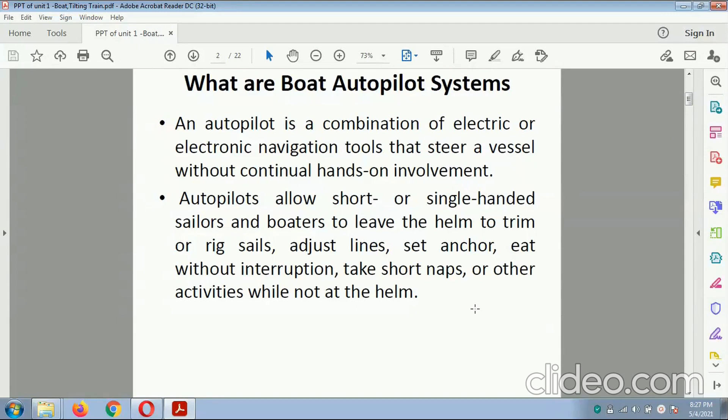So autopilots have been used on commercial sail and power vessels for over a century in various forms, making navigation safer and more convenient. Mariners have called the autopilot by nicknames like Iron Mike or Otto, that is a silent crew. Autopilots for smaller vessels are generally priced below 1 lakh with limited features. The below deck ones are higher performing and complex, and cost is upward.

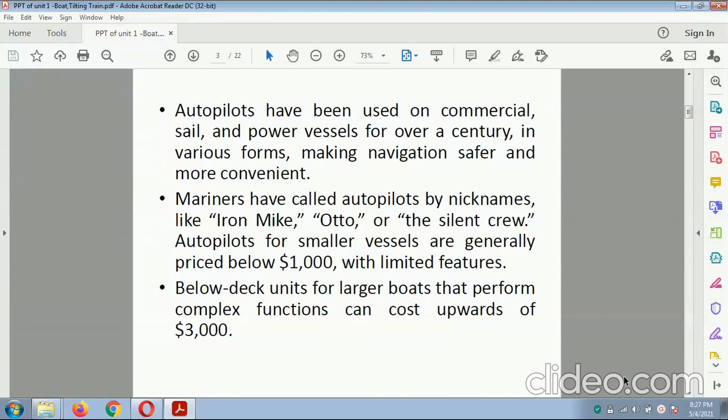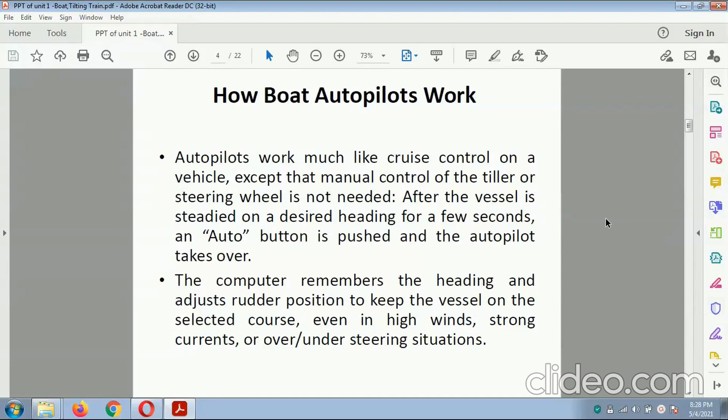How does the autopilot work? The autopilot works much like cruise control on a vehicle, except that manual control of the tiller or steering wheel is not needed. After the vessel is steadied on the desired heading for a few seconds, an auto button is pushed and the autopilot takes over. The computer remembers the heading and adjusts the rudder position to keep the vessel on the selected course, even in high winds, strong current or under steering situations.

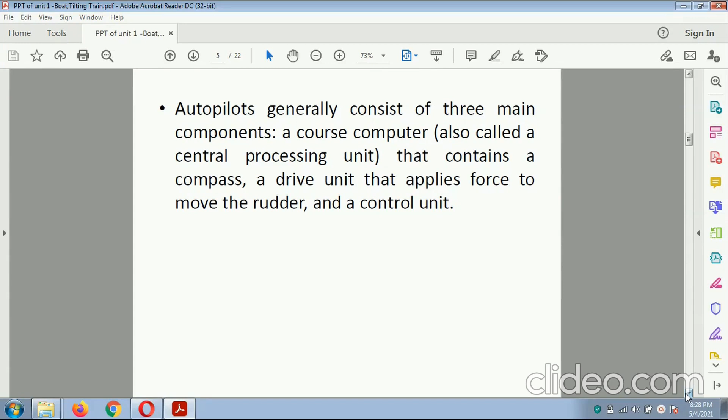An autopilot generally consists of 3 main components: a course computer, called the central processing unit, that contains the compass, a drive unit that applies the force to move the rudder, and a control unit. The different types of autopilot system: autopilots come in a variety of arrangements, dictated by the vessel length, displacement and steering type, including above deck units and below deck units described below.

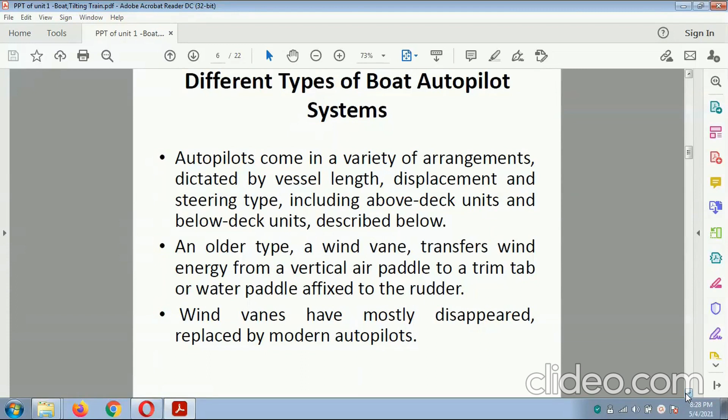An older type, the wind vane, transfers wind energy from a vertical air paddle to a trim tab or water paddle affixed to the rudder. Wind vanes have mostly disappeared, replaced by modern autopilots.

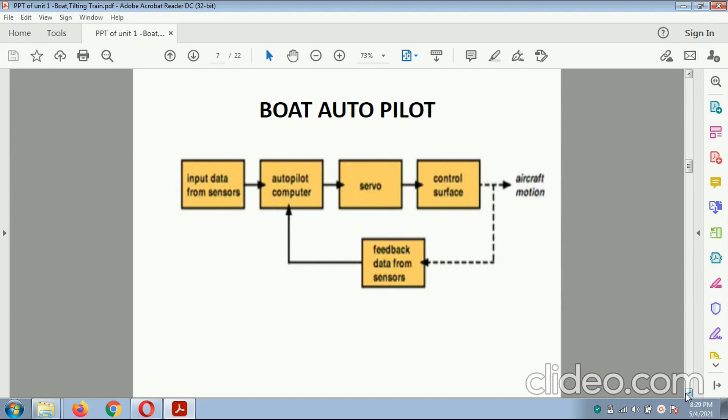This is a diagram related to the autopilot system. The input data from the sensor is sensed. The autopilot is controlled with the computer. Then this data is transferred to the servo motor. This data is transferred to the control surfaces, and with respect to that the aircraft motion is carried out and the feedback goes to the autopilot control computer. So this is the traditional diagram which explains the autopilot system.

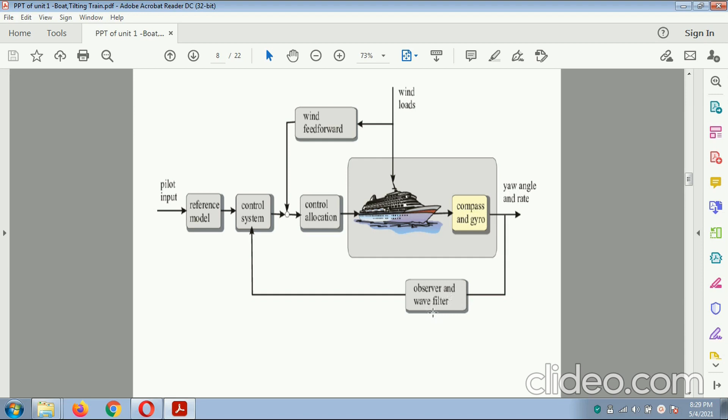From the start, see my cursor, the wind load is applied on the boat, the wind feedforward goes to the control allocation, the pilot input, reference model and control systems are attached, and this wind feedforward again goes to control allocation. With respect to the compass and gyro, the yaw angle and rate can be calculated, the water waves are observed, and feedback goes to the control system. So in this way the autopilot works.

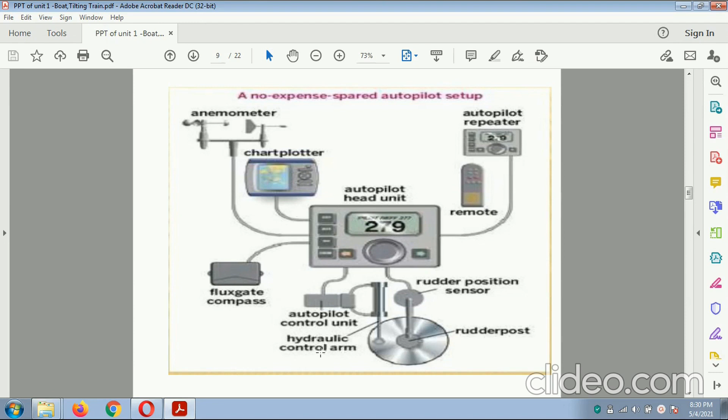The anemometer is attached, the chart plotter is attached, fluxgate compass is attached, autopilot repeater is attached with remote, and these are controlled with respect to the rudder post, and the rudder post works with respect to the hydraulic arm. Autopilots are self-steering devices for power or sailboats. They can hold the vessel on a preset compass course, and sophisticated pilots can be connected to a GPS receiver or gather data from boat instruments, and can handle a lot more advanced tasks.

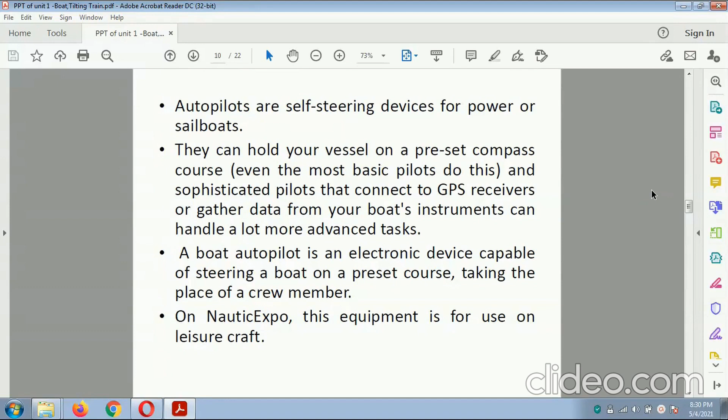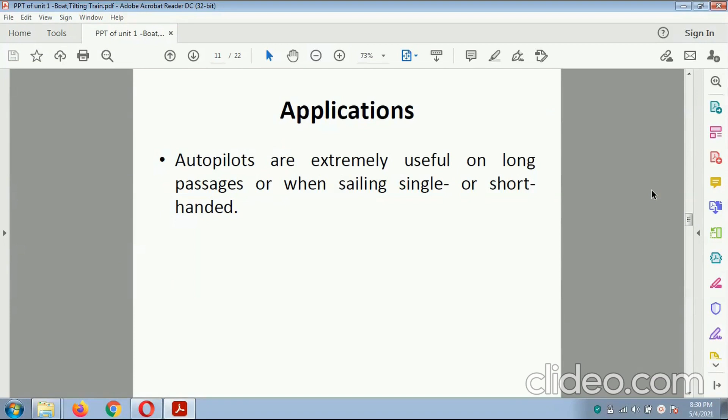A boat autopilot is an electronic device capable of steering a boat on a preset course, taking the place of crew members. Application: autopilots are extremely useful on long passages or when sailing single or short-handed. The technology: most autopilots include an electro-hydraulic pump and cylinder constituting the system's mechanical arm. The cylinder actuates the helm according to instructions from the electronic control unit. The control unit analyzes the input data and sends instructions to the pump cylinder.

The sensor reads the current course from the gyro compass as well as the helm position. The control screen is used to configure the autopilot and indicate the course to be followed. Some autopilots are better suited to motor vessels and others to sailboats. They also vary by steering system: tiller, wheel, quadrant.

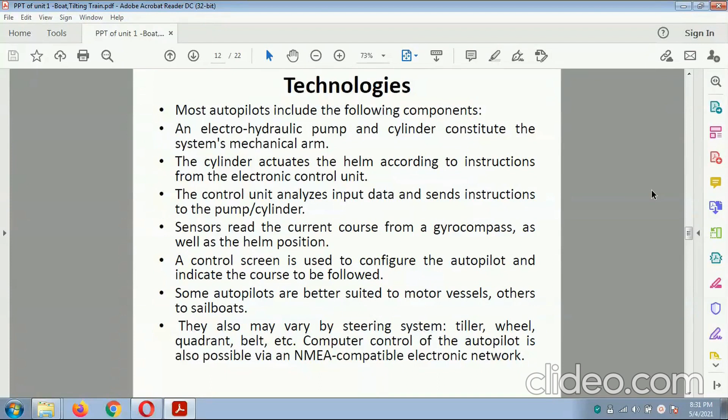The computer control of the autopilot is also possible via an NMEA-compatible electronic network. The autopilot is a combination of electric or electronic navigation tools that steer a vessel without continuous hands-on involvement.

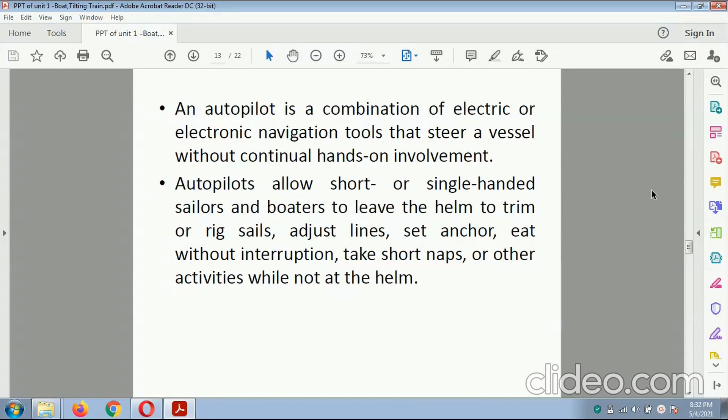The autopilot allows the short-handed or single-handed sailor or boater to leave the helm, to trim the sail, adjust lines, set anchor, eat without interruption, take short naps and other activities while not at the helm.

The high-speed tilting train. The second point is the high-speed tilting train. All students know what the tilting train is. When the speed is increased and there is a turn, the train appears to tilt. The train does not tilt, but it gives the position like tilting. So, the high-speed tilting train.

The tilting train consists of a tilting mechanism that enables it to increase the speed on regular track. In the upper part of the tilting train, the passengers are seated, tilted sideways. During the motion of the train, if the train has to steer left in a left turn, the coach of the train will be tilted to the left in order to compensate the centrifugal push to the right, and conversely during the right turn.

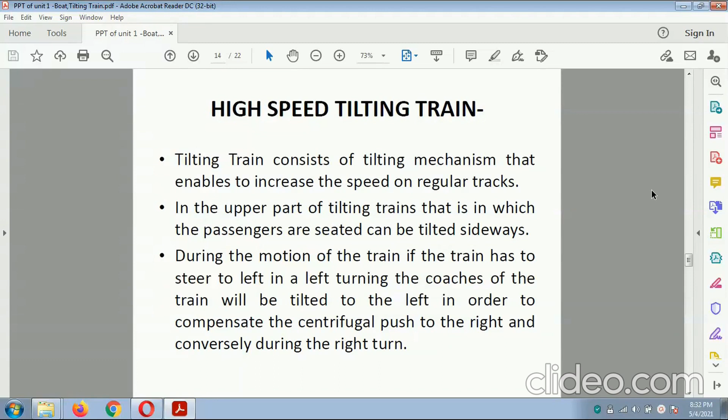The tilting train can be classified into different categories according to the features of their tilting system. On every type of tilting train, the tilting system shall perform three main functions. First, they have to identify accurately and without delay the initial position of the curve transition. Second, they have to tilt the car body according to the tilting algorithm provided by the system. And finally, they have to verify that the provided amount of tilt corresponds to the tilt demand.

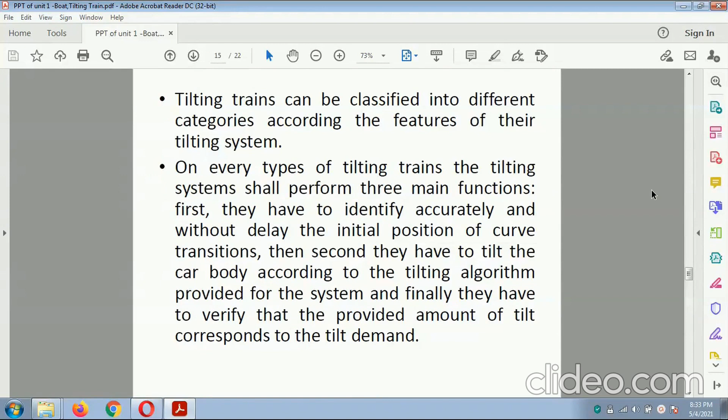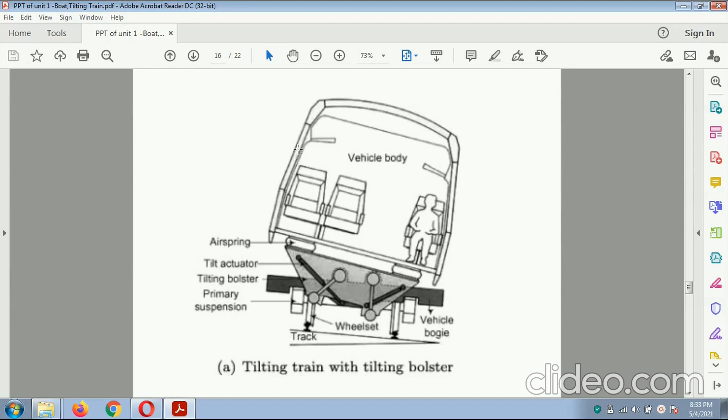So this is a diagram related to the tilting system. This is the track, and this is the position of the track. In that position, the wheel is set, and with respect to the force acting on the train, it can be tilted, and the train does not drop down because the centrifugal force is generated at this side. With respect to that side the train can only tilt, it cannot drop down, and in this way the track angle can change while increasing the speed of the train.

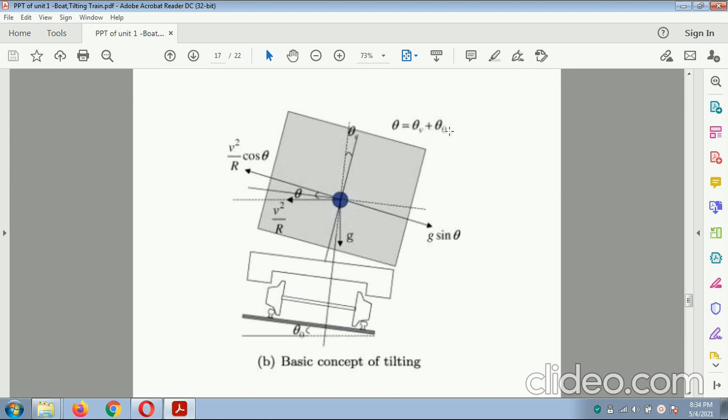The principal concept of the car body of a tilting train. Active tilt is actively controlled by sensors and electronics and executed by an actuator, usually hydraulic or electric. This normally has no impact on the safety of an actively tilted train. The center of gravity does not essentially change in the lateral position.

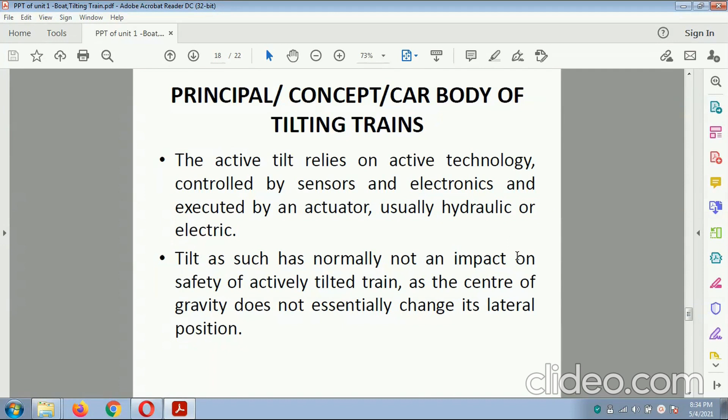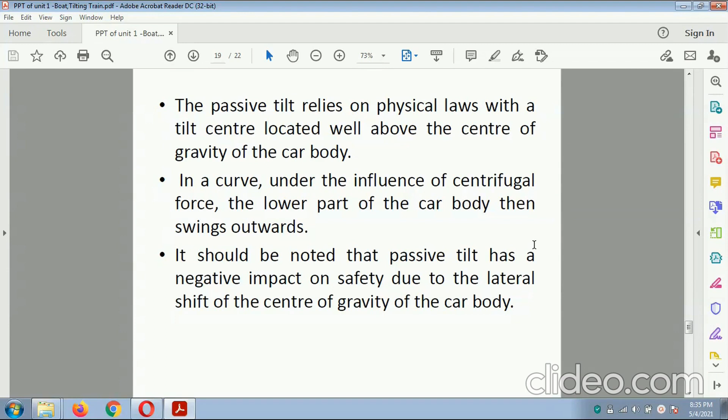So the train and the train passengers are subjected to the lateral force when the train passes through a horizontal curve. The car body rolls inwards and reduces the lateral acceleration felt by the passengers, allowing the train to navigate curves at higher speed. Trains tilting the car bodies inwards in curves are called tilting trains.

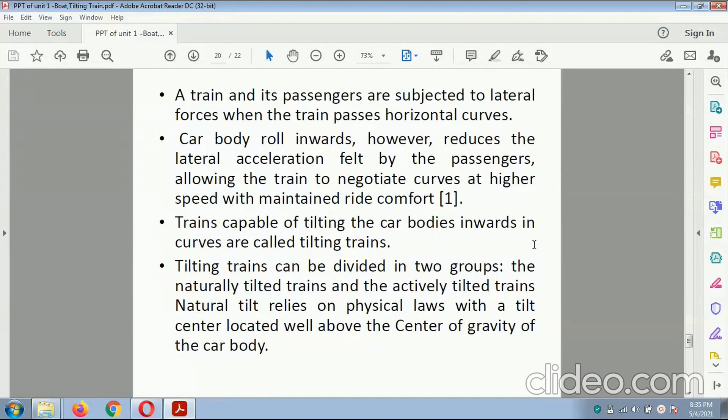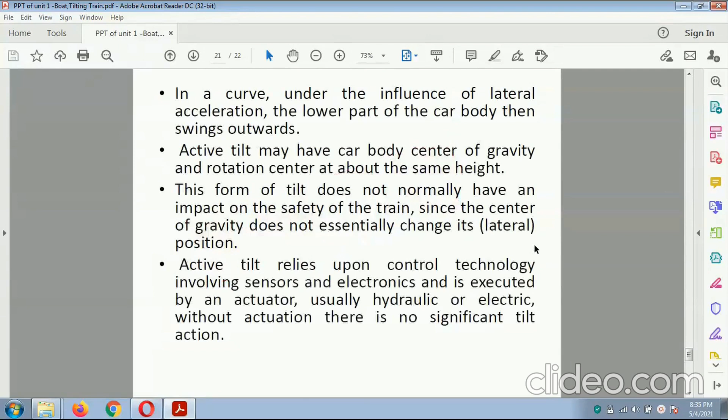If the train is tilted, it does not drop down because the centrifugal force is generated with respect to this tilting, acting in the opposite direction. If the train tilts to the left hand side, then the centrifugal force is generated on the right hand side and pushes the train to the right hand side, so that the train only tilts and does not drop down.